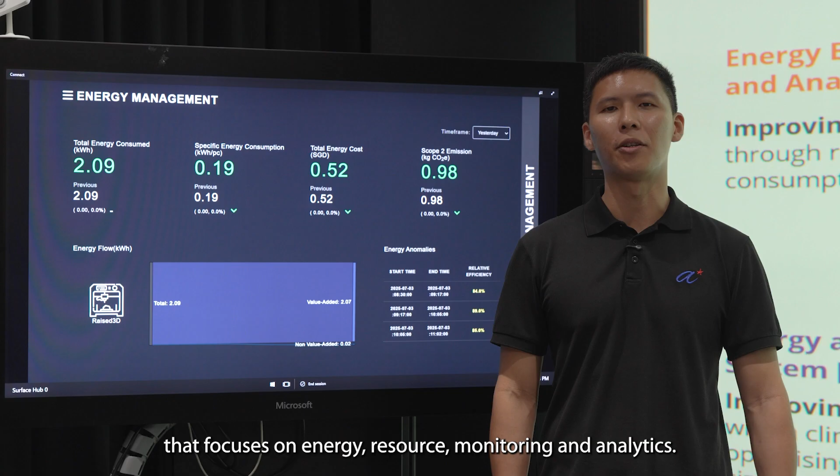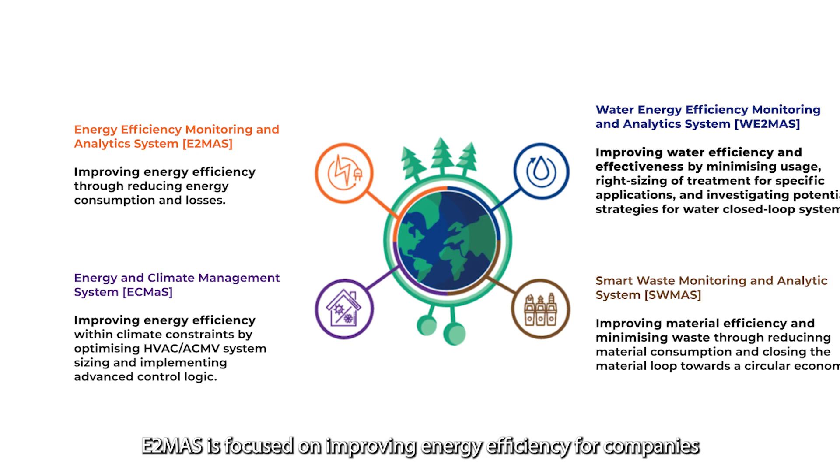Today, I'll be presenting to you the E2MAS platform that focuses on energy and resource monitoring and analytics. E2MAS is short for Energy Efficiency Monitoring and Analytics System. It is part of the 4 key modular platforms for energy and resource analytics. E2MAS is focused on improving energy efficiencies for companies, focusing on equipment, processes or even production lines to reduce overall energy consumption and losses.

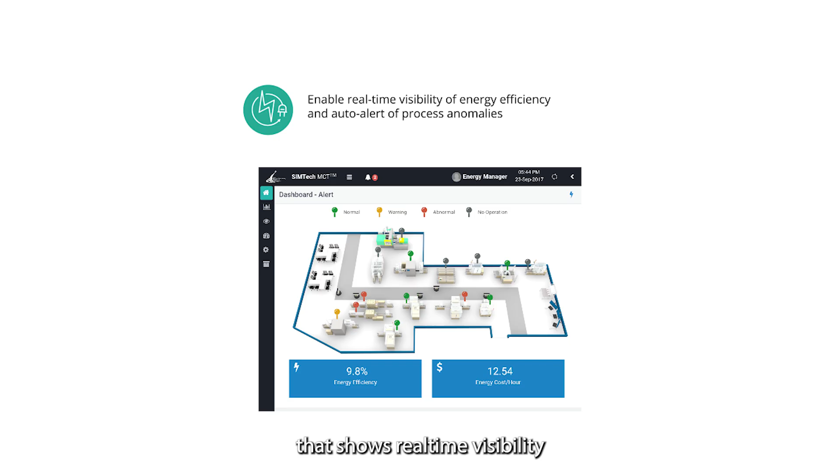There are 3 main key features for the E2MAS platform. First, it comes with an interactive dashboard that shows real-time visibility of all the machines in the shop floor. By having real-time visibility of energy consumption of the machines in the shop floor, we will be able to identify the highest energy-consuming equipment to look into and improve our energy consumption.

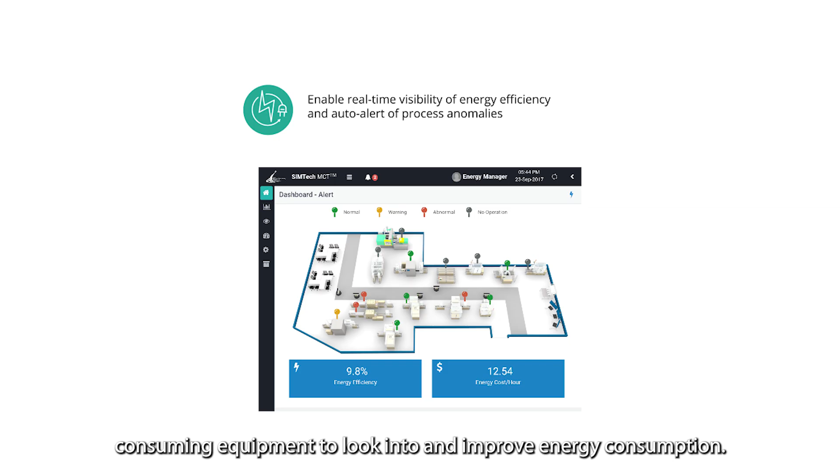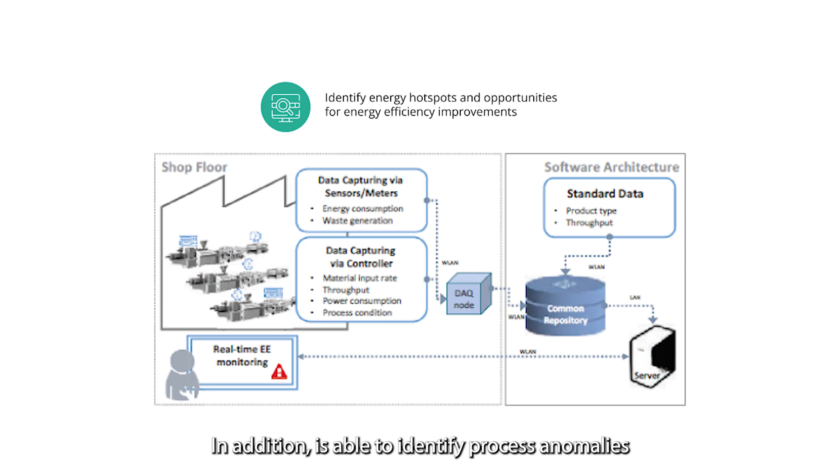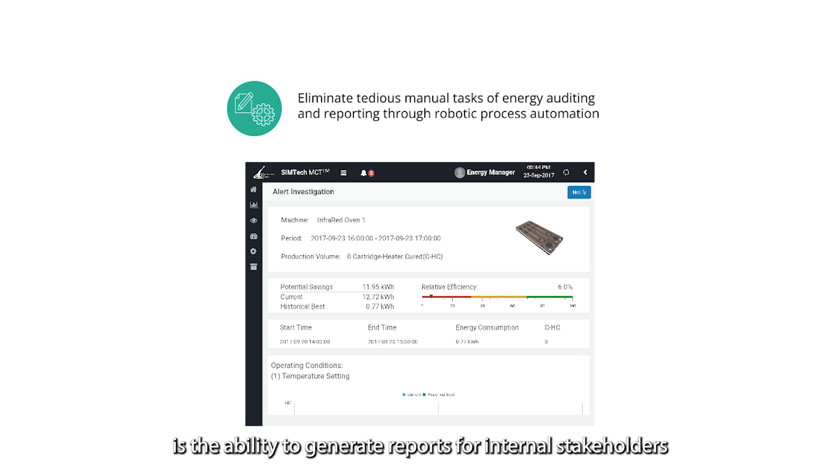The second feature of E2MAS is the suite of data analytics modules that is able to identify energy hotspots and opportunities for energy improvements. In addition, it is able to identify process anomalies through energy efficiencies and notify users whenever there are such incidents for them to look into. The third feature is the ability to generate reports for internal stakeholders to enable data-driven decision-making, as well as external stakeholders for energy and sustainability audits.

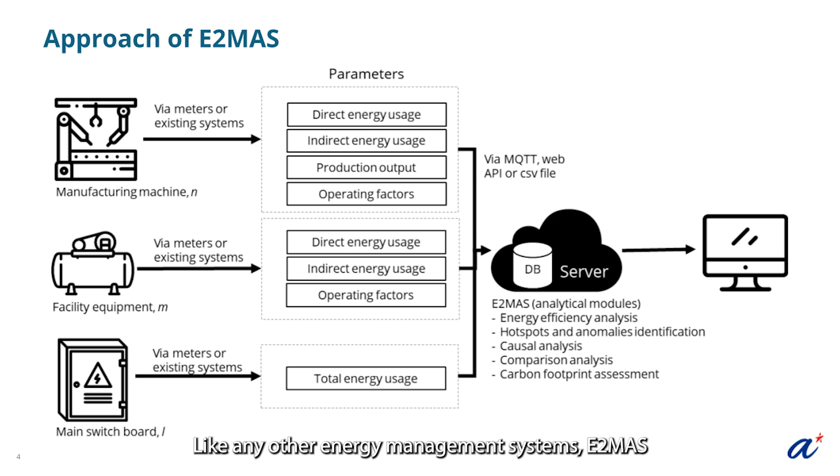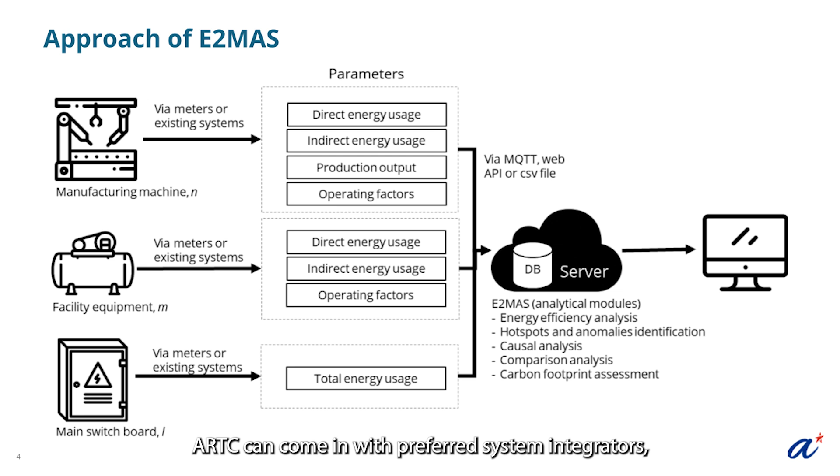Like any other energy management system, E2MAS requires data to be collected from equipment. Data such as energy consumption, production output, and operating factors has to be collected in real time from existing meters or systems and then stored into a database server, where the E2MAS platform will tap on this data to show it on the interactive dashboard. In the event where companies are unable to fulfill the E2MAS requirements, ARTC can come in with preferred system integrators, either from companies or from ARTC, to help them bridge the gaps to enable full functionality of the E2MAS platform.

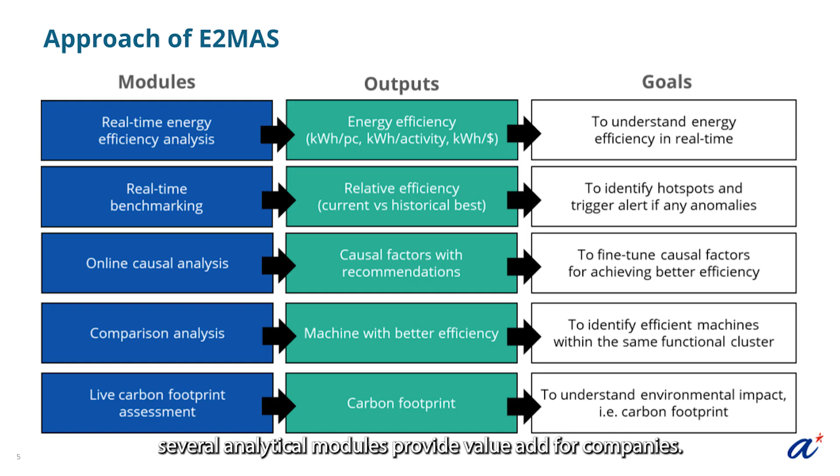As mentioned earlier, E2MAS comes with several analytical modules to provide value add for companies. The first module is a real-time efficiency analysis, where it looks into energy efficiencies for production parameters such as produced unit activities, or in a case where we want to compare different plants, it will be in terms of revenue dollar. The second module is a real-time benchmarking analytical module, where it identifies the historical best energy efficiency of a particular equipment. By having this information, you can compare the energy efficiency from the current state to the historical best and identify if there are any anomalies or hotspots in the current process.

So the third module is the online causal analysis. In an event where anomalies are detected, this analytical module will be able to identify causal factors or operating parameters for customers to fine-tune on their machines or processes to achieve better energy efficiencies.

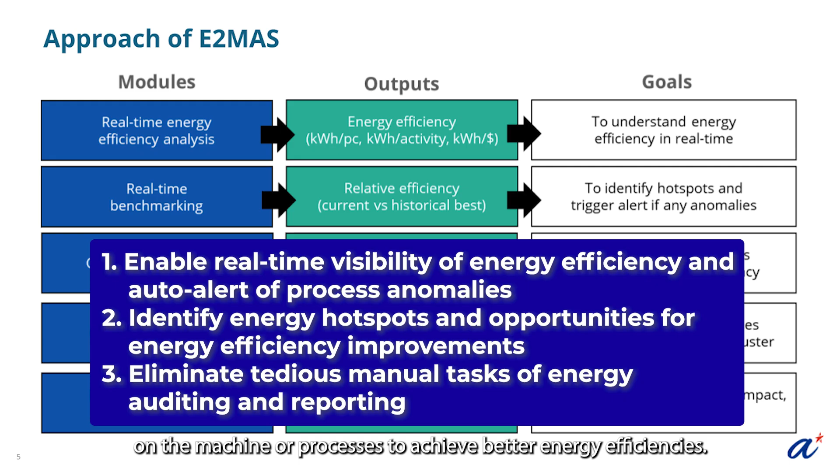Let me give you an example of how E2MAS can help in terms of a particular production process for the company. In this case, we'll be going through a heating process to provide an oxide layer on silicon wafers, and this is very common in the semiconductor industry. As you can see, in the green box is the process flow in terms of how operating parameters such as temperature, process time, ramp up and ramp down rate will affect the oxide thickness being produced on the part itself. And of course, with the operating factors, there will be electricity consumption.

E2MAS will look into historical data and identify the optimal parameters to achieve the highest energy efficiency. And making use of the online causal analysis module, it is also able to identify key operating factors to allow customers to know what parameters are required to achieve the highest energy efficiency. On the bottom right-hand corner of the slide, you can see a table of the current operating parameters as well as the optimal parameter settings to obtain the highest energy efficiency.

As you can see, both parameters are able to achieve the same outcome of 1 micron oxide thickness. However, energy consumption is 30% less in the optimal condition. If we study deeper through the parameter settings, even though we observe that temperature is higher at 1150 degrees Celsius for optimal settings compared to 1000 degrees Celsius for current, where we expect more energy consumption, the process time is 60% less for the optimal condition. Through this information, we are able to conclude that having a higher temperature setting will not only reduce process time, but also give a 30% reduction in energy consumption.

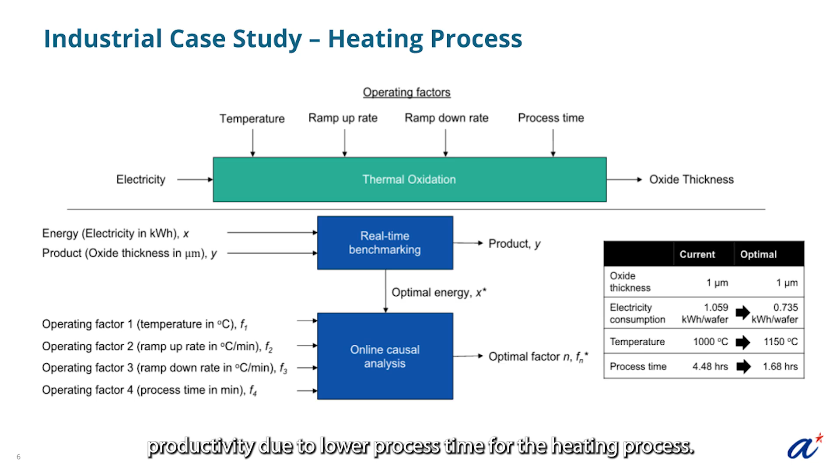We have worked with a particular company called LHT. LHT produces pallets that are used in industry for packaging. As you can see from the graph in the middle, there are 4 different stages of energy consumption. The first 2 from the left indicate the production volume as well as energy consumption in the morning, and the remaining 2 on the right indicate the energy production and energy consumption for the afternoon.

From what we observe, energy consumption is actually lower in the morning than in the afternoon. We have reported this to LHT, and they have further investigated what are the key parameters that are affecting this lower energy consumption in the morning. Using this information, they are able to overall improve their energy consumption in the later part of the day, in the afternoon, to save 20% of energy consumption, and this also results in a 20% reduction of carbon emission.

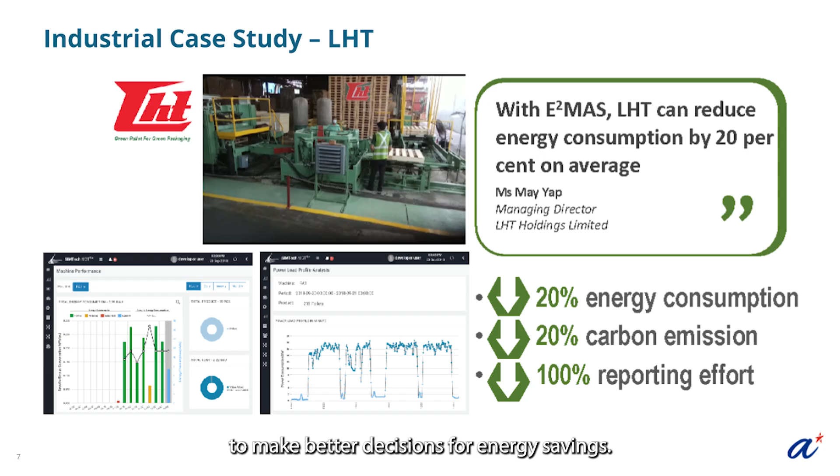As most of the processes for reporting are completely manual, by using this E2MAS platform, they are able to convert energy reports into a completely digital process, and as reports are also stored within the E2MAS platform, they are easily accessible to make better decisions for energy savings.

Now, I will show you a live demonstration of how the E2MAS platform is able to provide value for equipment like a 3D printer. We have connected a power meter to a 3D printer to obtain the energy data, and also tapped on the process parameters such as temperature and layers of print, using this information to display on the screen itself. Let me bring your focus to the E2MAS dashboard.

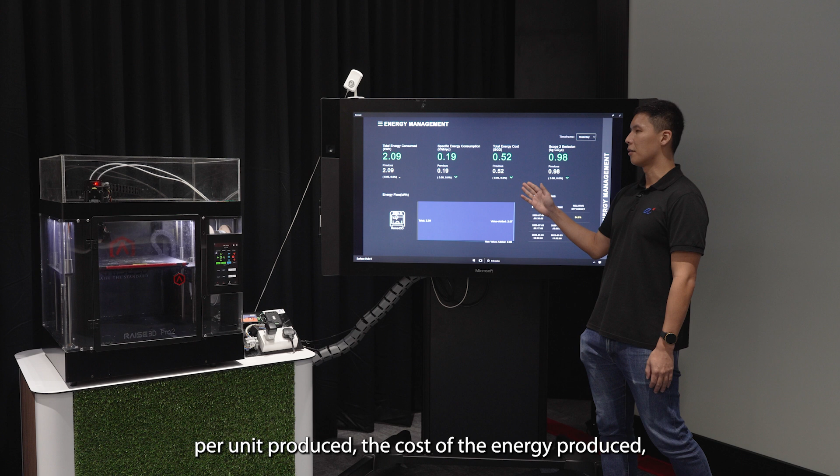As you can see, it gives several kinds of indicators for the 3D printer process. First, it will show the energy consumption in kilowatt hours, the specific energy consumption, meaning the energy consumption per unit produced, the cost of the energy, as well as the amount of carbon footprint that is generated through this process. Here you can see the energy flow, the total energy consumption as shown over here, and the value added and non-value added values.

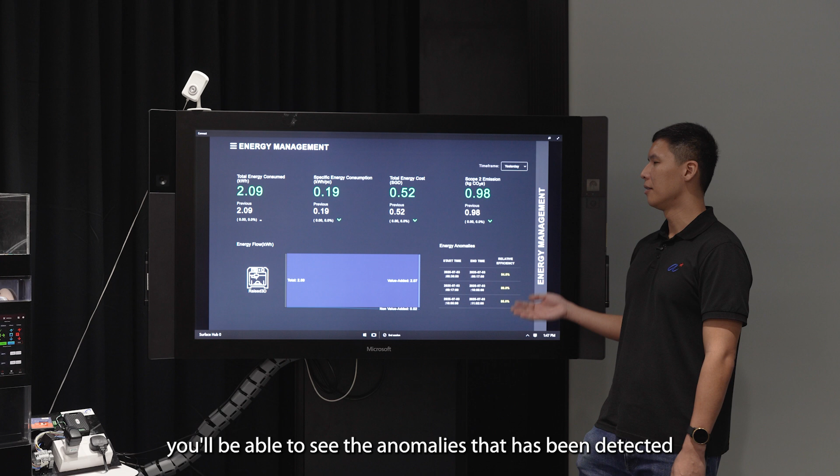Value added values represent the amount of energy that is consumed to actually produce a part, while non-value added is energy consumed for non-essential parts, such as when the machine is idle. In this area, you will be able to see the anomalies that have been detected from the 3D printing process and the respective efficiencies of the energy consumption of the 3D processes during these particular time frames.

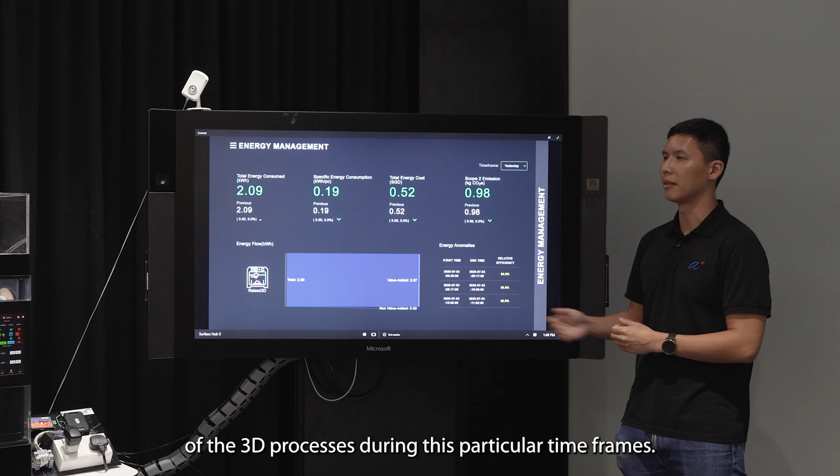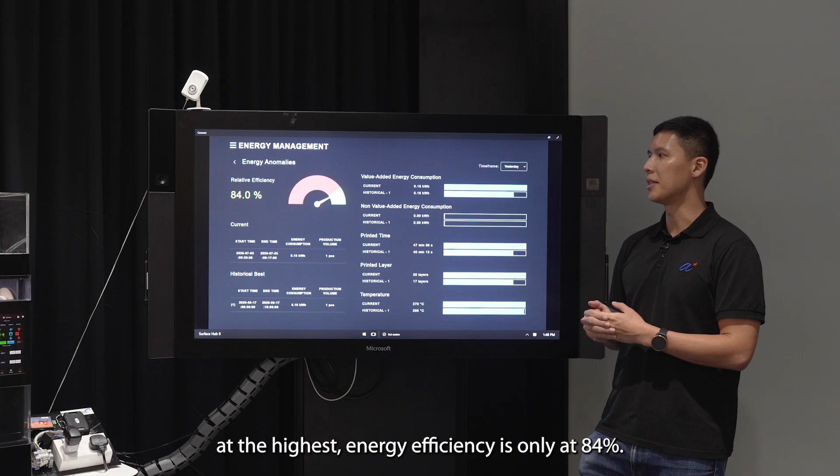If we go deeper to investigate the reasons behind these low energy efficiencies, we can see that relative to past performances at the highest energy efficiency, it is only at 84%. And if we look at the key parameters that have been shown over here, we can compare between the historical best as well as the current state. So the reason behind the lower energy efficiencies can come from 2 reasons.

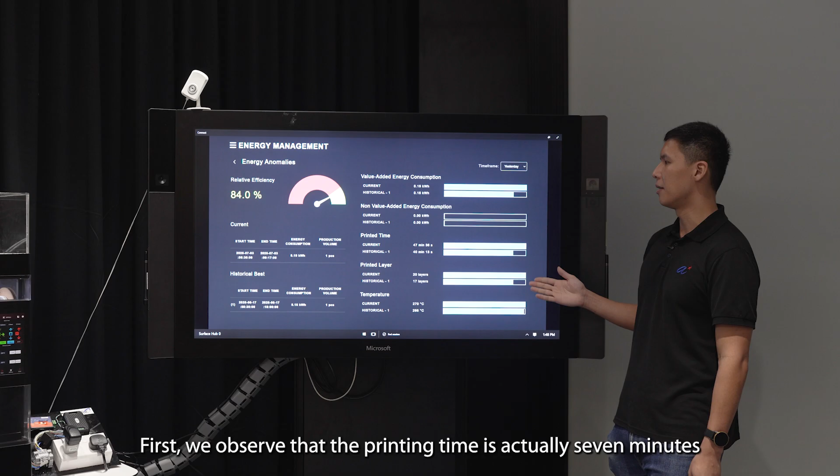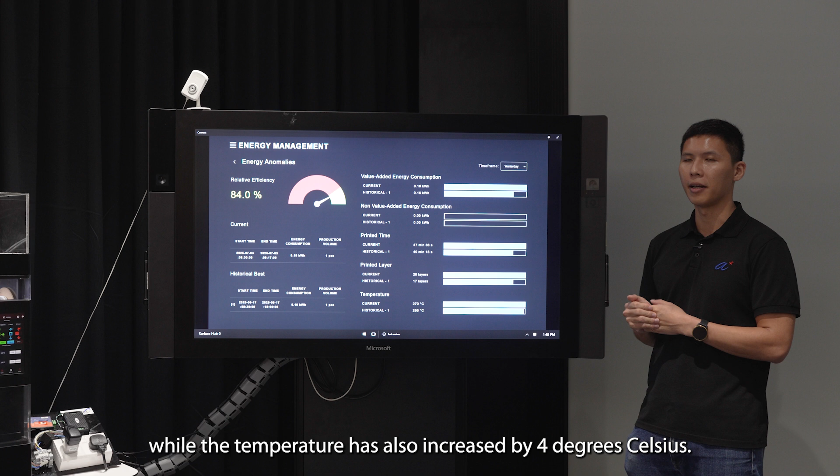First, we observe that the printing time is actually 7 minutes lower for the optimal condition compared to the latest print. And if you look deeper into the process parameters itself, the number of printed layers has actually increased by 3, while the temperature has also increased by 4 degrees Celsius. As a result, even though we are printing the same parts, the machine is actually printing more layers and using more energy to increase the temperature to print these layers.

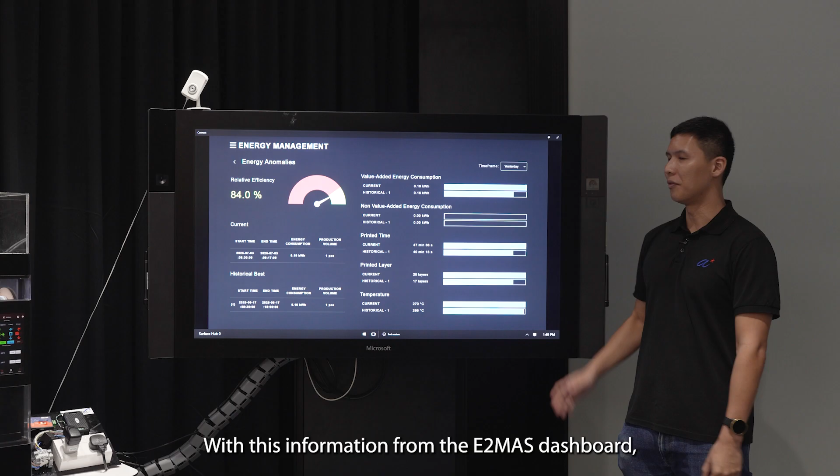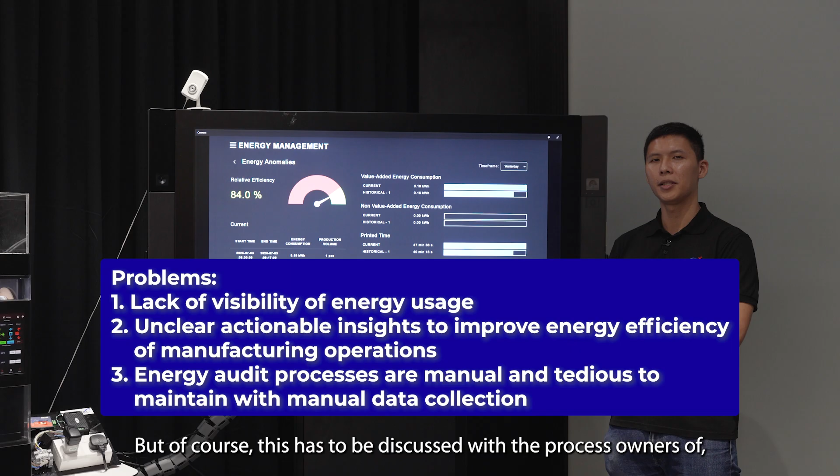With this information from the E2MAS dashboard, companies will be able to identify anomalies in real time and look at what process parameters have been applied in the past to have the ideal energy consumption. With this, they can apply these old parameters into their current production to reduce energy consumption. But of course, this has to be discussed with the process owners of, for example, this 3D printing machine to enable a good interaction and the need to save energy.

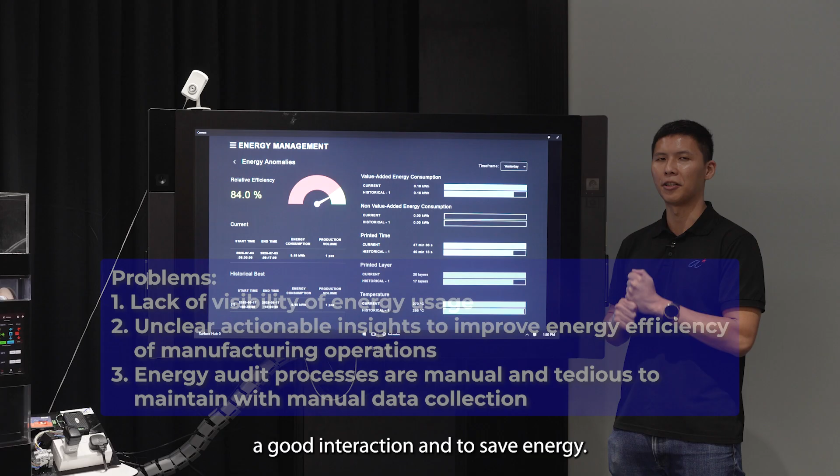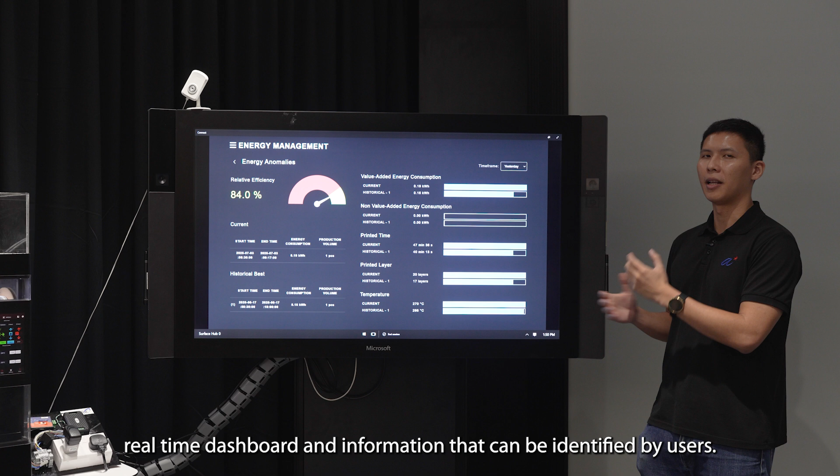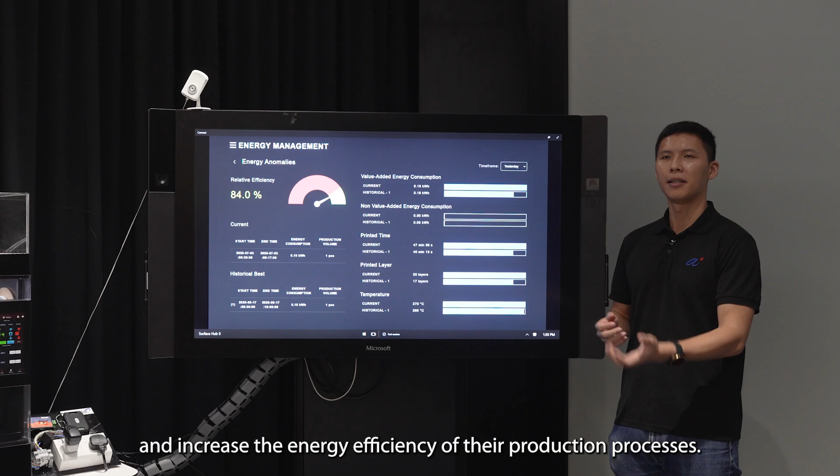So in conclusion, E2MAS is a monitoring and analytics platform for key production processes on the shop floor. With this real-time dashboard and information that can be identified by users, companies can make full use of data to make good decisions to improve their energy consumption and increase the energy efficiencies of their production processes.